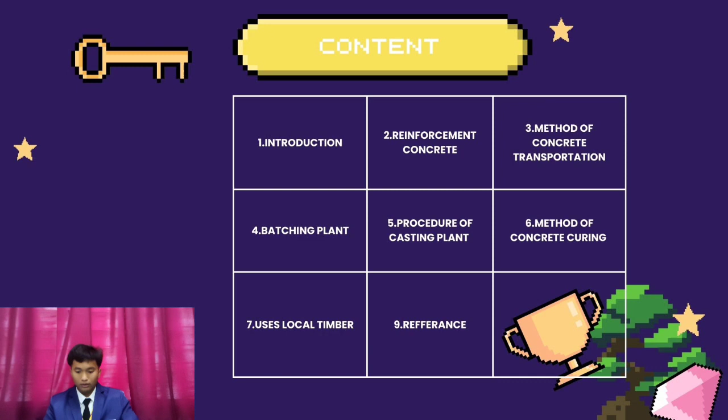Firstly, I want to touch about the introduction of the Terengganu Drawbridge. Do you know that the Terengganu Drawbridge is the first movable bridge in Malaysia? The Terengganu Drawbridge applies a hydraulic system in the bridge, so the bridge can move upwards if a ship wants to pass by.

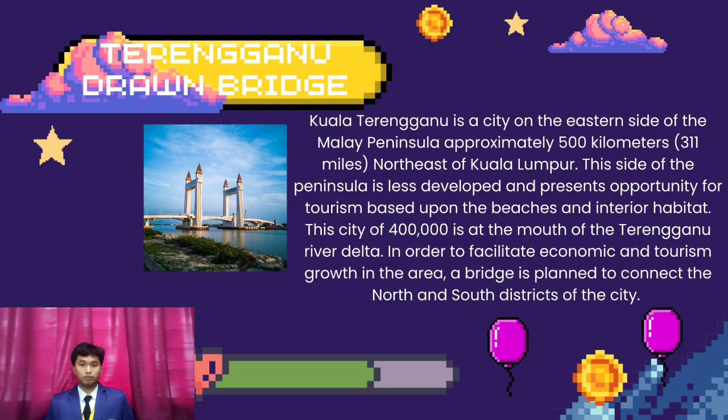What is reinforcement concrete? Reinforced concrete is a composite material widely used in construction that combines the properties of concrete and steel to create a structurally sound and durable material.

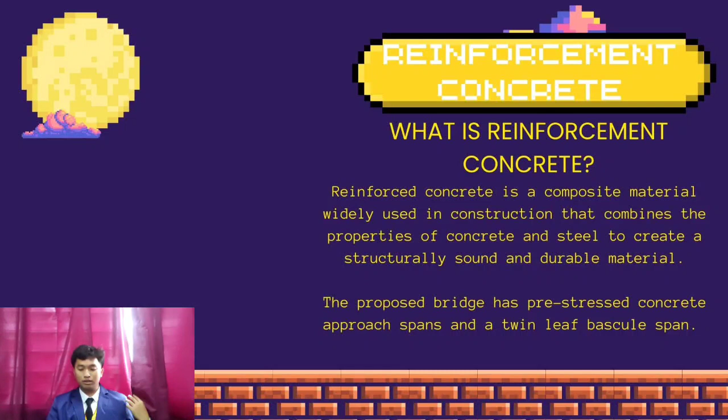So in the Terengganu Drawbridge, the proposed bridge has pre-stressed concrete approach spans and a twin leaf bascule span. This long bridge carries 4 travel lanes, sidewalks, and median barriers. These bridges are designed using concrete beams to provide a minimum under clearance of 2.2 meters to allow cars to be parked. This parking area will be utilized by the public to both enjoy the waterway as well as access to amenities at the bridge.

The movable span provides a navigation channel with infinite vertical clearance. The clearance under the bridge, when closed, is 12 meters. For this reason, it is important to simplify the construction as much as possible while maintaining the required functionality.

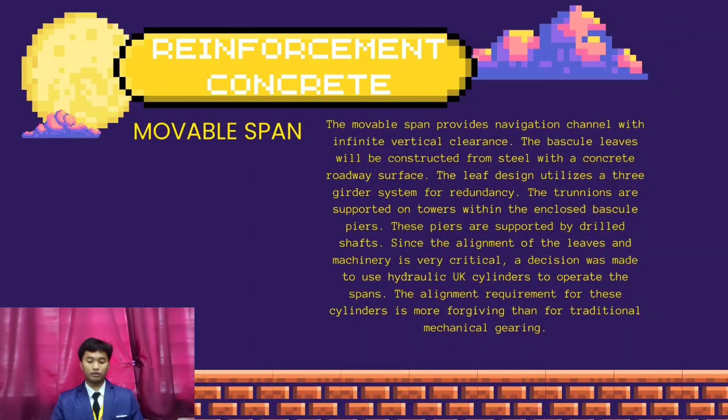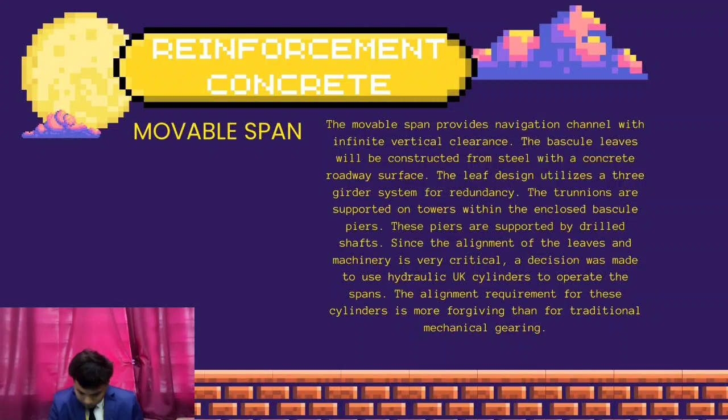So we go to the towers. The signature features of the bridge are the towers and the public space created by the connecting structure, Skybridge. The tower actually replicates the minarets of a mosque and provides a Malaysian version of the Tower Bridge in London. The Skybridge public space is between each pair of towers.

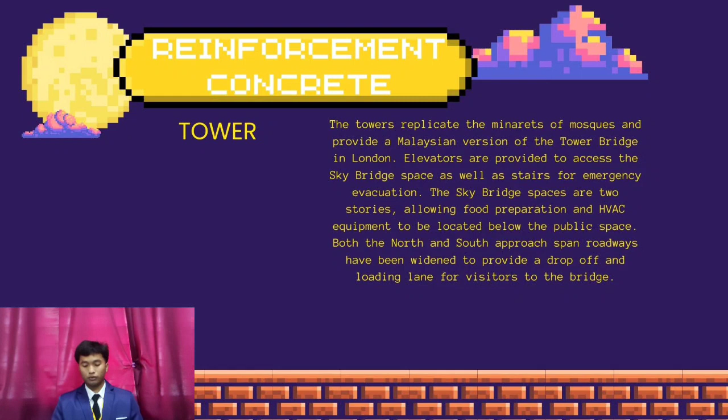Elevators are provided to access the Skybridge space as well as stairs for emergency evacuation. The Skybridge spaces are two stories, allowing food preparation and HVAC equipment to be located below the public space. Both the north and south approach span roadways have been widened to provide a drop-off and loading lane for visitors to the bridge. Hello, my name is Teddy Celista Vilio.

For my part, I will explain what concrete transportation and batching plant mean on the construction site. Firstly, concrete transportation is where we transport freshly made concrete to the construction site. Meanwhile, batching is the process of preparing concrete that will be transported to the construction site. Now that we know what concrete transportation and batching plant are, let's dive into the types of concrete transportation to the construction site.

Firstly, we have ready-mix concrete trucks. What is a concrete truck? A concrete truck is a vehicle that transports freshly processed concrete from the batching plant to the construction site. It has a drum at the back to ensure that the transported concrete remains in a workable state, continuously mixing as it travels to the construction site.

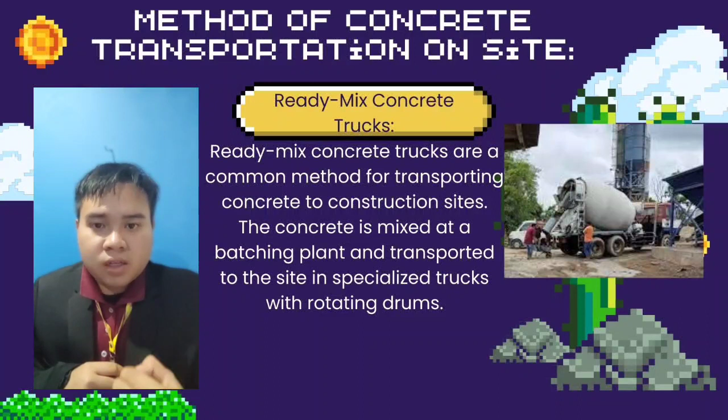Next, we have concrete pumps. How does a concrete pump move the mixed concrete to the construction site? It's simple. The concrete pump uses a system of pipes or hoses to distribute the concrete to locations that are difficult to reach or at higher elevation.

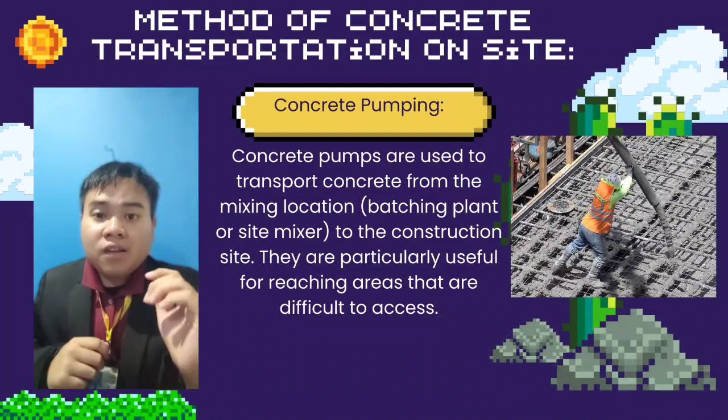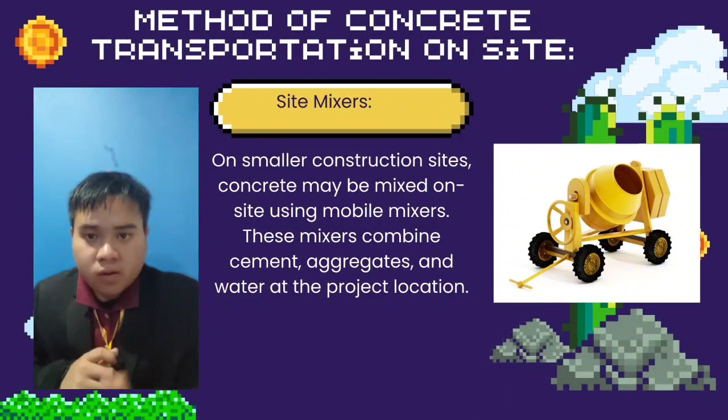Curing is the process or operation which controls the loss of moisture from concrete after it has been placed in position or in the manufacture of concrete product, to provide time for the hydration of the cement to occur. Since the hydration of cement does take time, days and even weeks rather than hours, curing must be undertaken for some specific period of time if the concrete is to achieve its potential strength and durability. Curing may also accomplish the control of temperature, since this affects the rate at which cement hydration occurs.

Method of concrete curing number 1 is water curing. The application of water is done to avoid the drying of the concrete surface. Usually this method applies when the concrete is thin. For example, in building construction, the curing of the floor slab can be done with this method. There are 2 methods to apply water on concrete: number 1 is ponding the concrete, number 2 is using sprinklers to spray water continually.

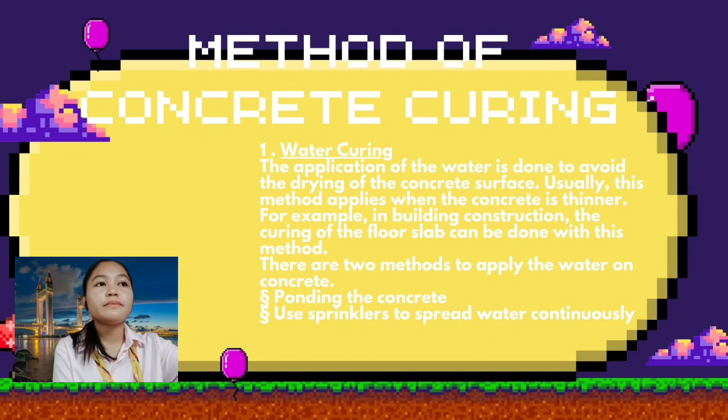Method of concrete curing number 2 is formwork curing. This is the most effective curing agent in construction, especially in thick concrete where the hydration temperature is high. This method is used in such cases.

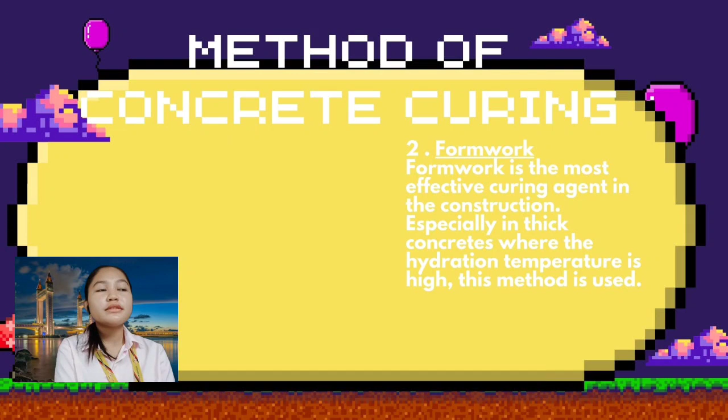Method of concrete curing number 3 is the hot mixing method. An increase in the temperature of the concrete is done to enhance the strength of the concrete. Raising the temperature of the concrete up to 32 degrees Celsius could enhance the strength by 10% to 20%. Since the concrete gets strength early, this method can be used in situations where early strength is required. Further, the formwork can be removed early with the early gain in strength. There are several methods that can be used to increase the temperature of the concrete: number 1 is increasing the temperature of aggregate by heating, number 2 is heating the water, number 3 is injecting steam into the concrete mix.

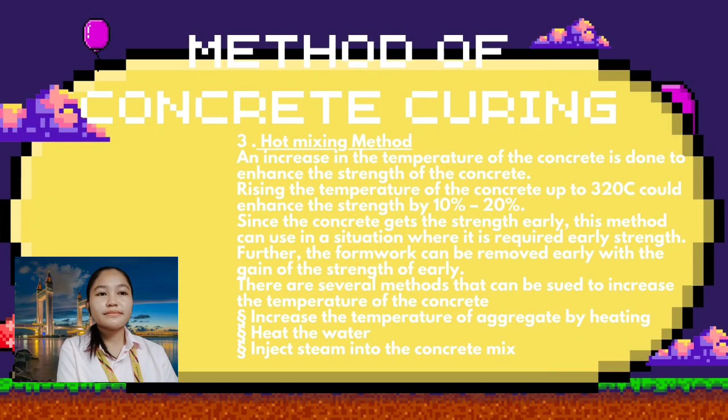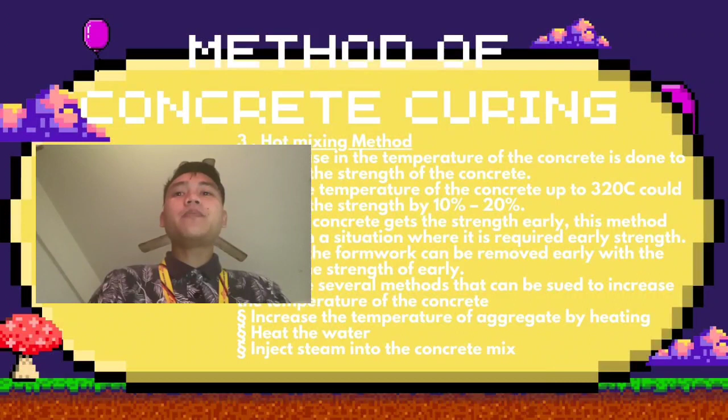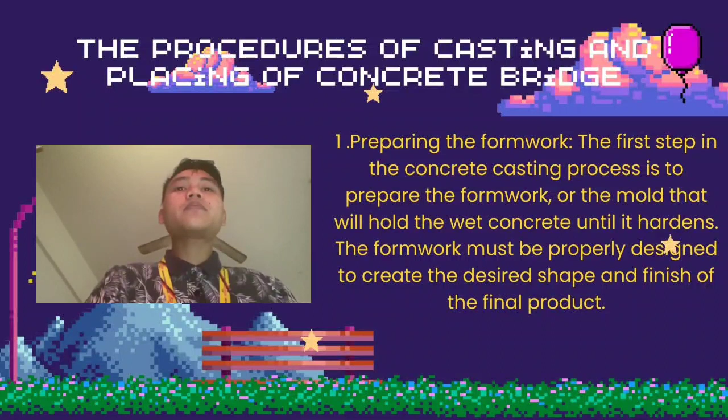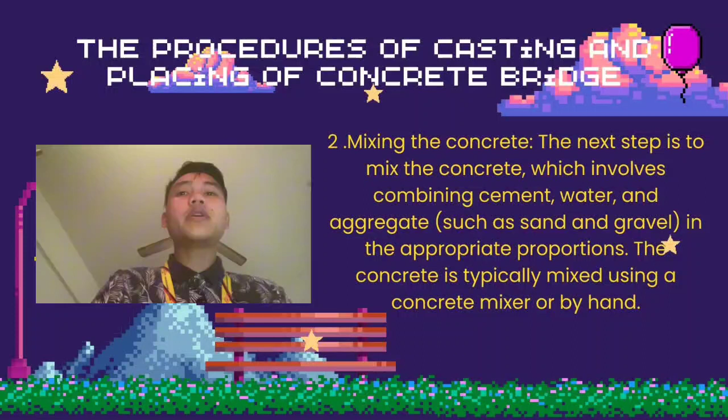Third, placing the concrete in the formwork. Once the concrete is mixed, it is placed in the formwork using a variety of methods, including hand shoveling or pumping. The concrete is typically placed in layers, with each layer being compacted to remove air pockets and ensure a strong and durable final product.

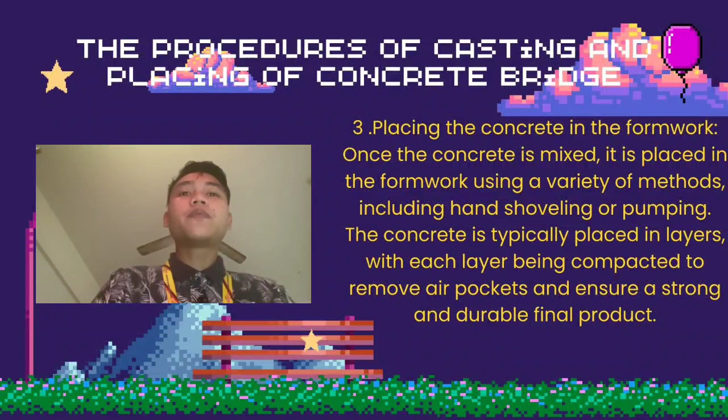Fourth, finishing the surface. After the concrete is placed in the formwork, it is typically smoothed and finished to achieve the desired surface finish. This can be done using a variety of tools, such as trowels, screeds, and floats.

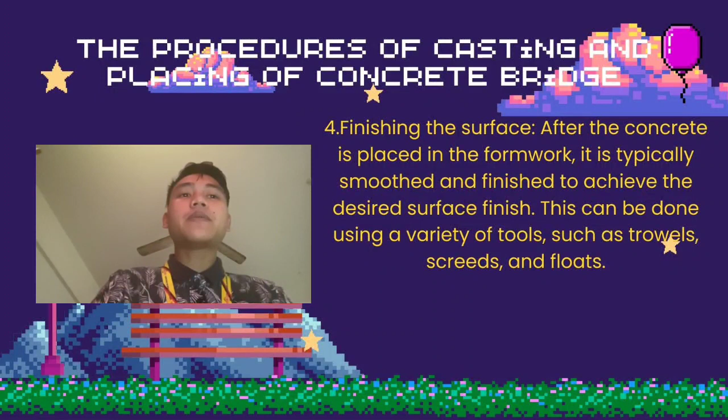Fifth, curing the concrete. The concrete is then allowed to cure or harden, which typically takes several days. During the curing process, the concrete must be protected from extreme temperature fluctuation and kept moist to ensure proper curing.

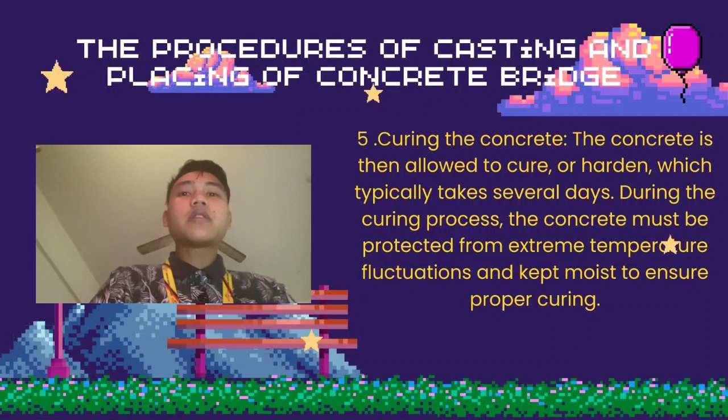Lastly, removing the formwork. Once the concrete has cured, the formwork can be removed to reveal the final product. The formwork is typically dismantled and the materials are reused or disposed of appropriately.

The concrete casting process is an essential part of the construction industry, as it allows for the creation of a wide range of structures and products using concrete. Proper execution of each step is crucial to the success of the project and the quality of the final product.

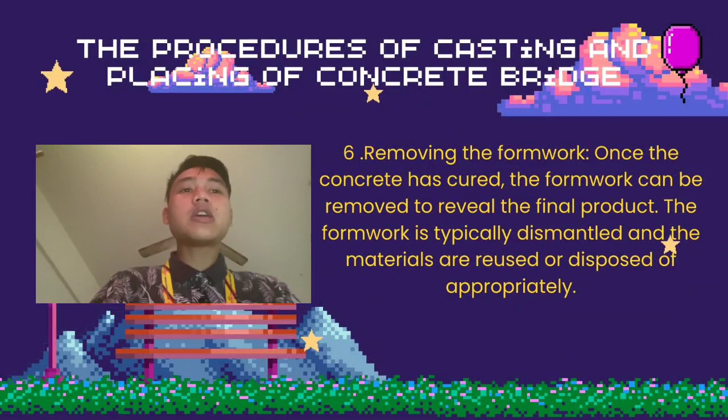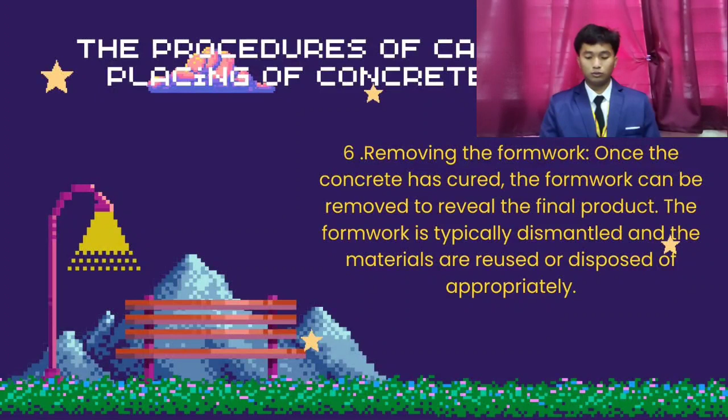So we go to products produced from local wood. In Malaysia, we have kayu meranti and also kayu merbau used to produce some of the local wood products. Meranti wood can produce strong doors. Other than that, meranti wood can also produce plywood.